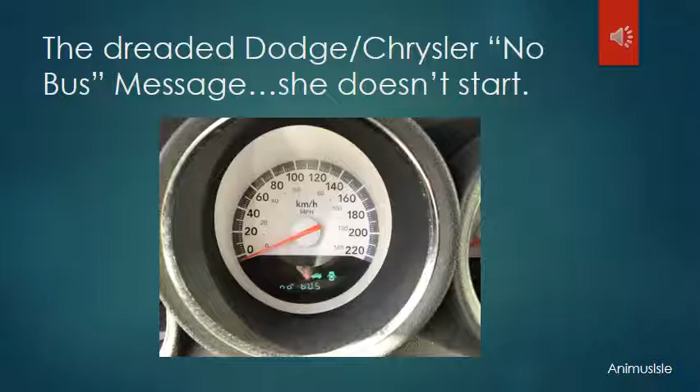I've got a longer video about this problem on my site, if you want to check that out, going through all the different things you can check. Basically I Googled a lot of stuff, checked a lot of different things, and the only thing left was a TIPM - totally integrated power module. You can see in the picture where it's located, and this shows you how to get it out and how to fix it.

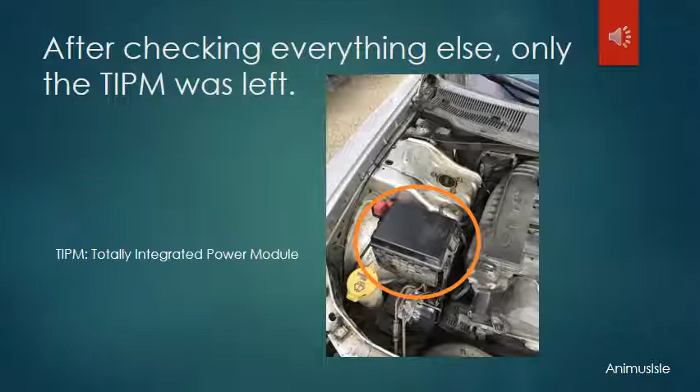There are a lot of connectors, and some of those connectors have white brackets that lift up and down to keep them in place. They're quite fragile - you have to be really careful lifting those so you don't break any little plastic knobs holding them in. There are some little red sliders on the side that you have to slide up, then you can pull the whole connector out. Be careful, because it looked like somebody had done it on mine before, and a couple of little knobs were broken. When I took them out I broke a couple more. I managed to fix them, but the best thing to do is just be really careful when taking it out so you don't break anything.

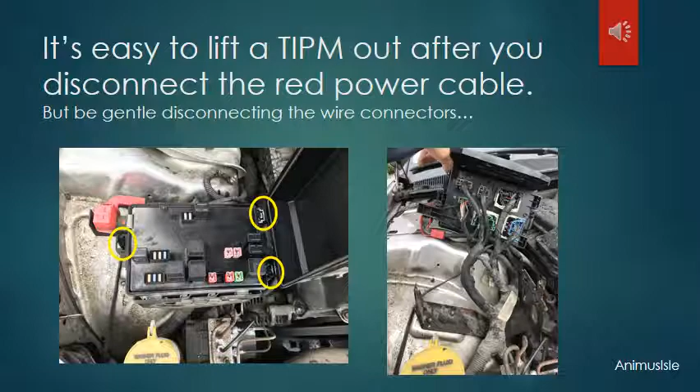The TIPM has a plastic box-like cover - that's the left-hand side picture. All the ID numbers of the relays and big and little fuses are on that cover. What I recommend for the black relays is that you scratch with a little screwdriver or sharp knife the number of each relay before you take them out. That way you put exactly the same one back in where it came out.

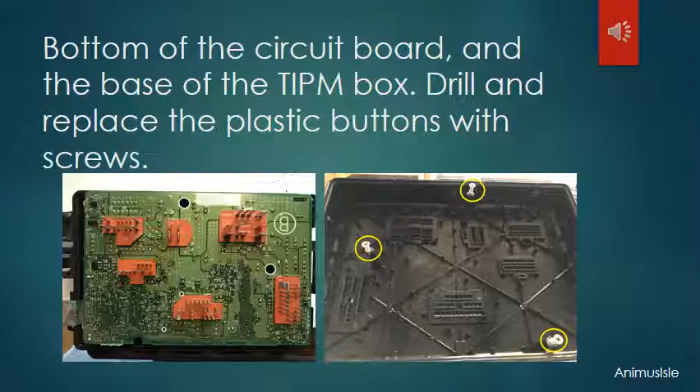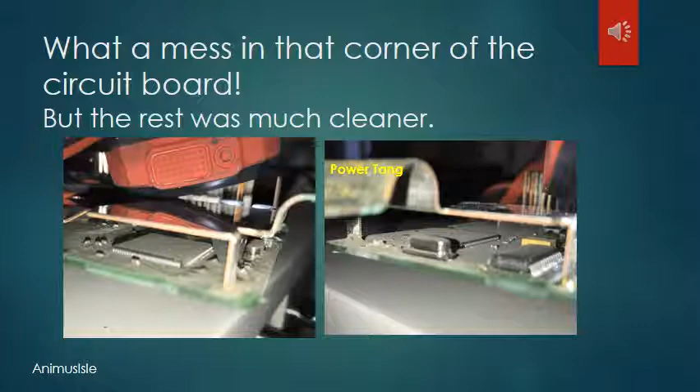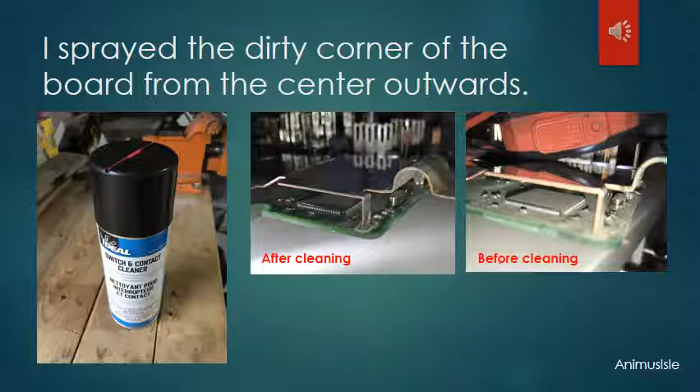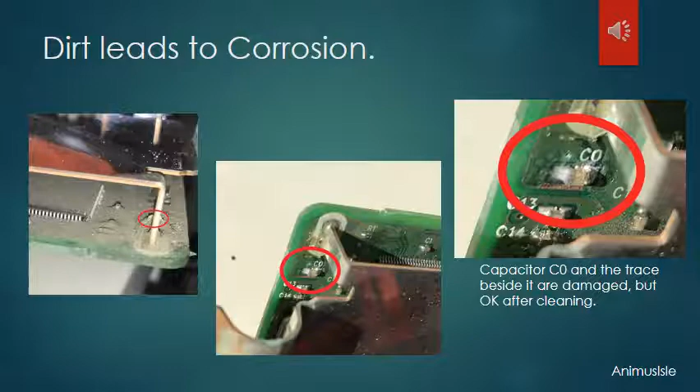So the next step is to buy yourself a tube of UV curing solder mask ink. It's only about $10. Before I put that on, I used a Q-tip dipped in a bit of acetone - stuff your wife uses to clean fingernails - and cleaned it up really well. Then I got a little paintbrush and painted this stuff on. You can use a bright white LED to cure this UV paint, and I also put it in a little bit of sunlight to make sure it was cured.

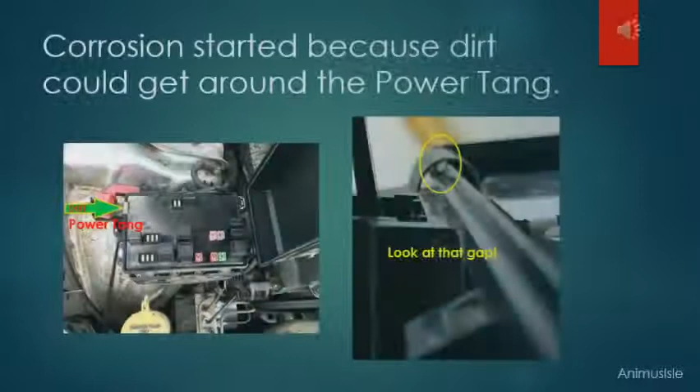So the question has to be asked: why was the corrosion there in the first place? Most of the board was clean, it was just this corner of the board. Well, if you take a look at that corner of the board, it's closer to where the power tang is.

That power tang, if you look at the left-hand side, wasn't sealed well, and that green arrow indicates where the dirt came in. If you take a close look at the left-hand picture, you can see there's some white dirt also on the top cover of the TIPM. So you can see there was stuff coming into it. And on the right-hand side, I've got a close-up showing where the power tang comes out from inside the TIPM, and there's a gap there - there was no seal there that I could see, and that's where the dirt was coming in.

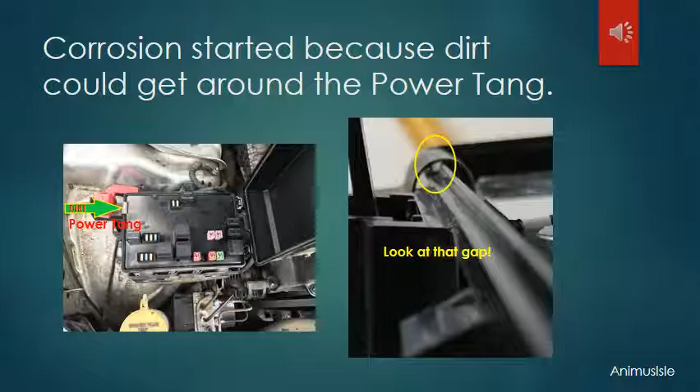I have no idea if this fix of mine is going to work. I saw corrosion there, I saw that bare copper trace. I cleaned it up, I put some of that UV paint on. But I still don't know whether this fix is going to work. I'm kind of cautiously confident.

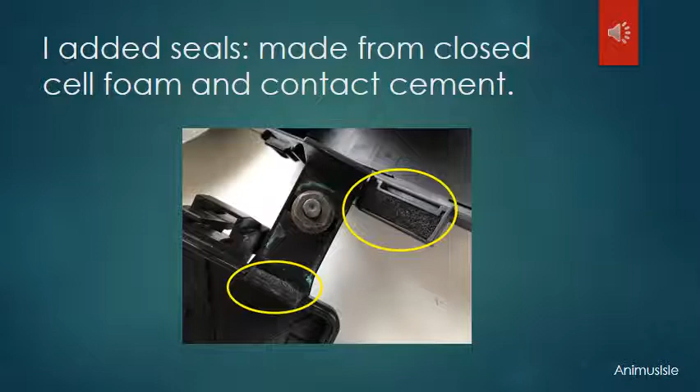So I reassembled everything: put the board back in, put the top back on the board, put those three little screws back in place, put the fuses back in, put the numbered relays back into their spots, snapped the cover back on, and fit it in place on the right-hand side into the engine compartment again. Plugged everything carefully, all those connectors underneath, made sure everything was nice and solid so they don't fall out, and there you go.

Was ready to go, but was it going to work?

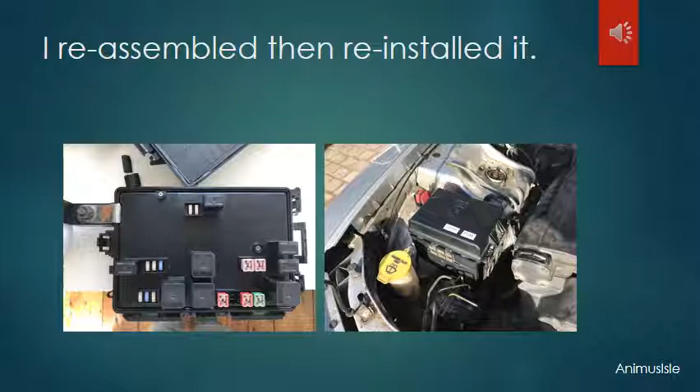Okay, so after I reconnected the battery, I opened the door, and either there was going to be a no-bus message or there was going to be an odometer reading coming up. But neither of those came up - there was nothing on the odometer. So I waited a couple of seconds and thought, well, what the heck, I might as well try it. So I sat inside the car, turned the key over, and boom, it started. Then the odometer reading came up. So that was good to see.

So this is how I fixed my car. It took me quite a while to get to this point. I hope this makes it a lot easier for you if you have a similar problem. Good luck and take care, and all the best.